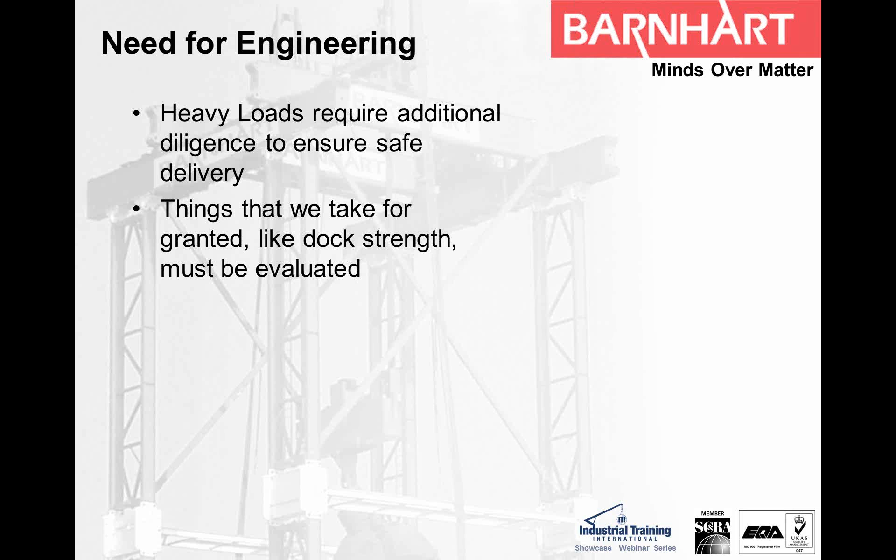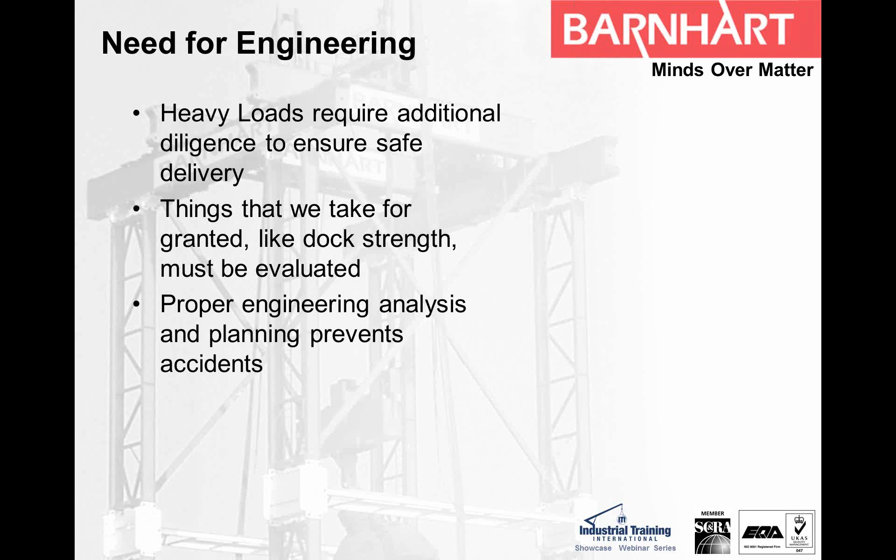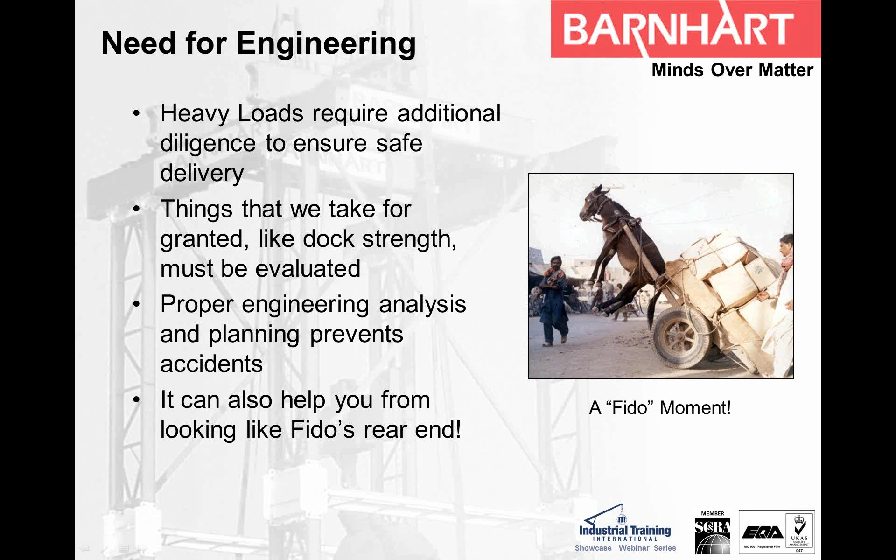Also, just as a little side note here, you see my friend being lifted up because they messed up the center of gravity. Here at our company, we have a saying that we don't want to look like Fido's rear end when we do our lifts. Obviously, we want to be safe, but we also don't want to look silly. And you can see here these guys having a Fido moment as they've loaded their cart too much and actually picked their prime mover off the ground.

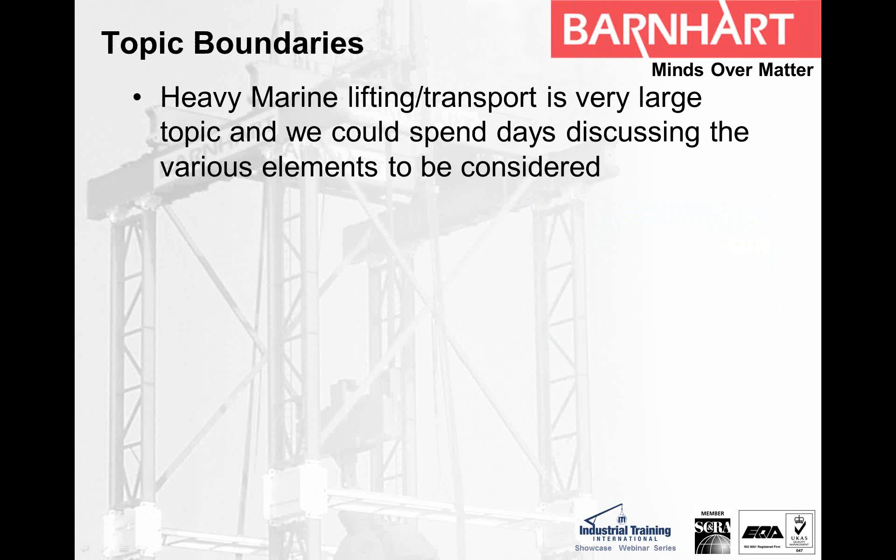So heavy marine and lifting transport is a very large topic, and I want to try to set a boundary for what we're going to talk about. We could literally spend days discussing all the elements that need to be considered. So what we're going to do today is limit our discussion to just the engineering associated with heavy cargo. Usually that's equipment like heavy wall vessels or generators, from offload from the ship to a transporter or rail.

We're not going to consider all the things associated with offshore maritime lifting or lifting in open ocean or even underwater lifting environments, even though those things may come into play sometimes when talking about maritime work. We're also not going to get into all the operational considerations either. You've got a lot of things other than engineering to consider when you develop these lift plans. We're not going to go into all those. I'll touch on some of them, but mainly I'm going to focus on the engineering associated with the work we're talking about.

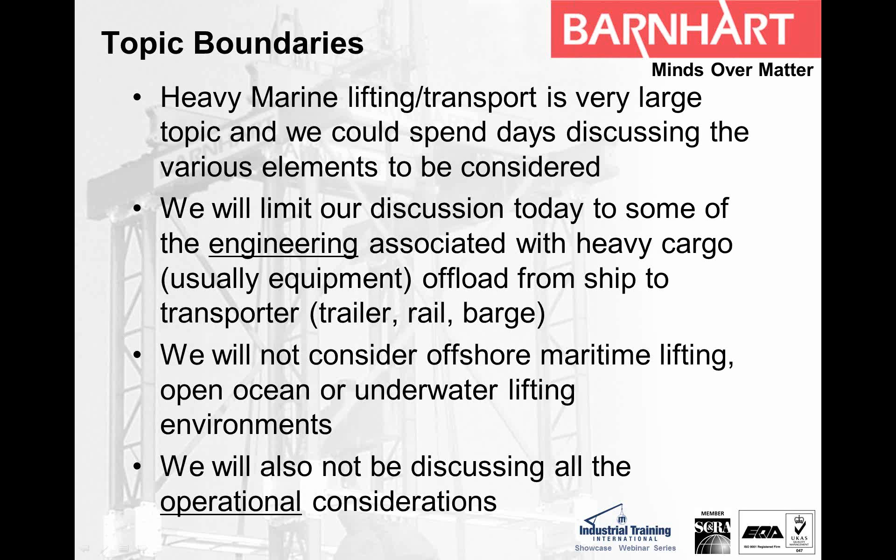All right, so the first engineering consideration really is the lift plan itself. And all heavy maritime lifting and transportation really does require that you have a lift plan.

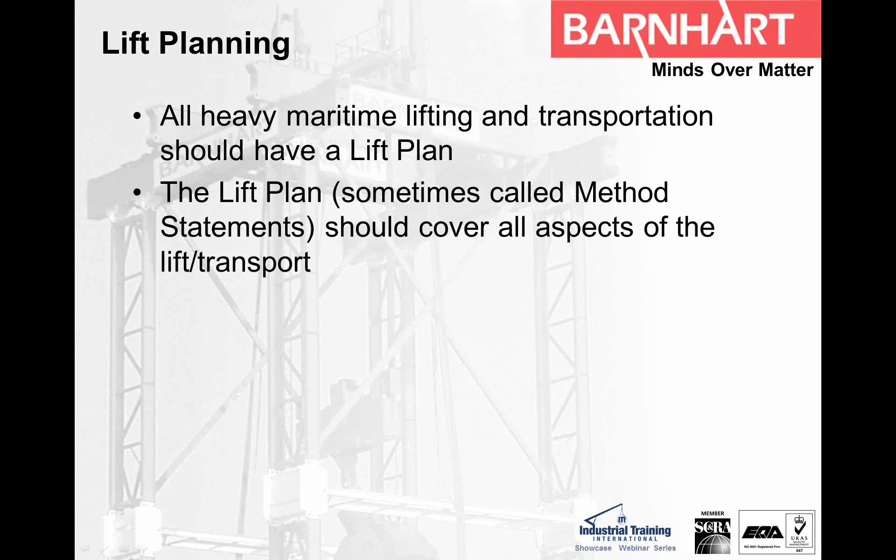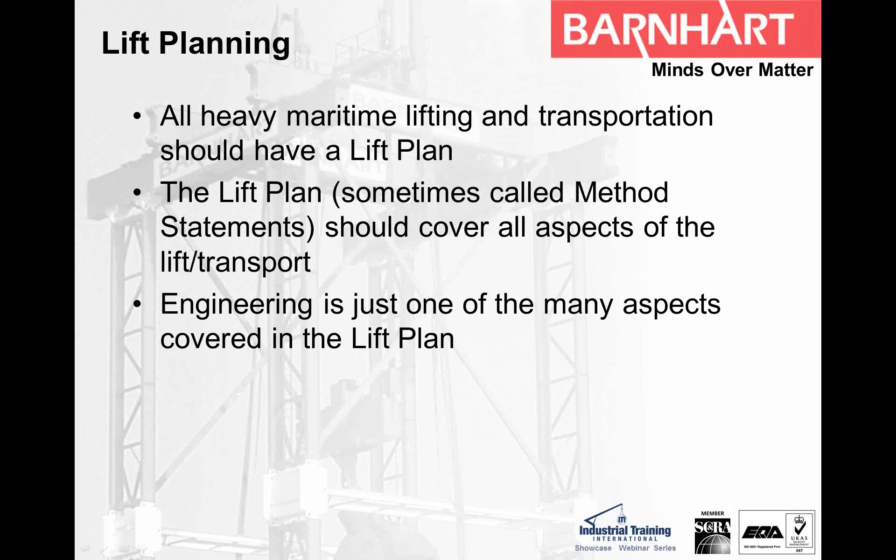The lift plan, which a lot of people now call method statements or project plans, should cover all aspects of the lifting and transport of this gear. In engineering, what we're talking about today is just one of the many aspects covered in a lift plan, so I'm not going to go into all the things in it. I'm just going to say there should be a complete, comprehensive lift plan associated with this type of heavy movement of equipment, and engineering is just one of the many pieces that fall into play.

There's a lot of good guidelines out there that talk about lift planning for maritime work and intermodal transport. Noble Denton, if you're not familiar with them, is like a tech service provider to the oil and gas industry, and they've written a lot of really good standards, from tie-down considerations on open ocean barges to what should be involved in a proper lift plan for heavy equipment. There are also two other organizations with similar guidelines: the International Maritime Organization and the International Marine Contractors Association. If you go online and Google them, they've got some really good guidelines for developing a lift plan.

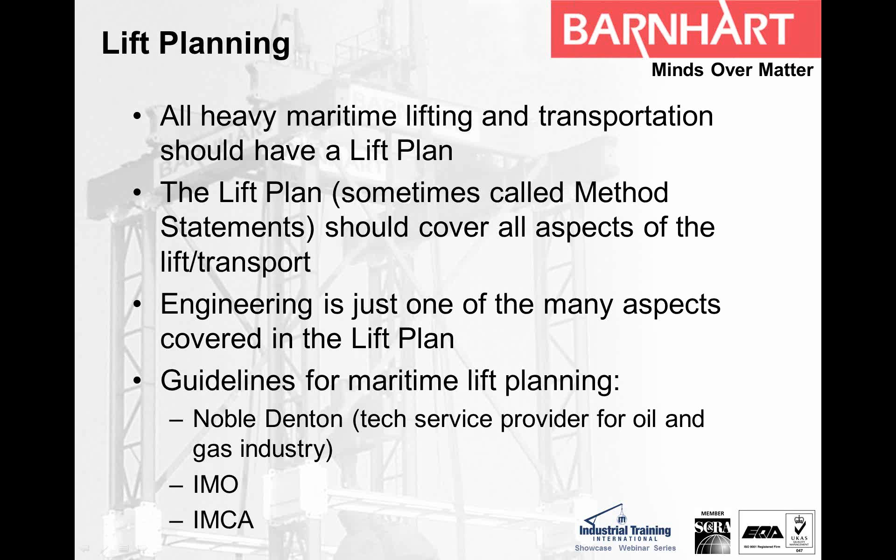So other than the lift plan, let's start talking about specifics. Let's look at what our ship considerations are going to be and the engineering associated with it. We're going to talk about four areas: the LHE associated with the ship, the position of the ship on the dock, ship stability, and some of the strength requirements associated with these big heavy transport ships, some of which are called ro-ro ships, where we're also going to look at the ramps.

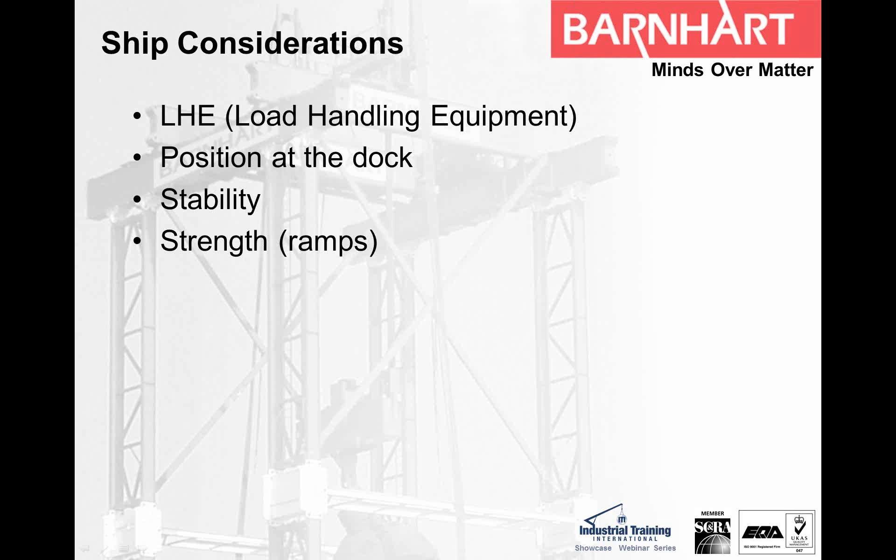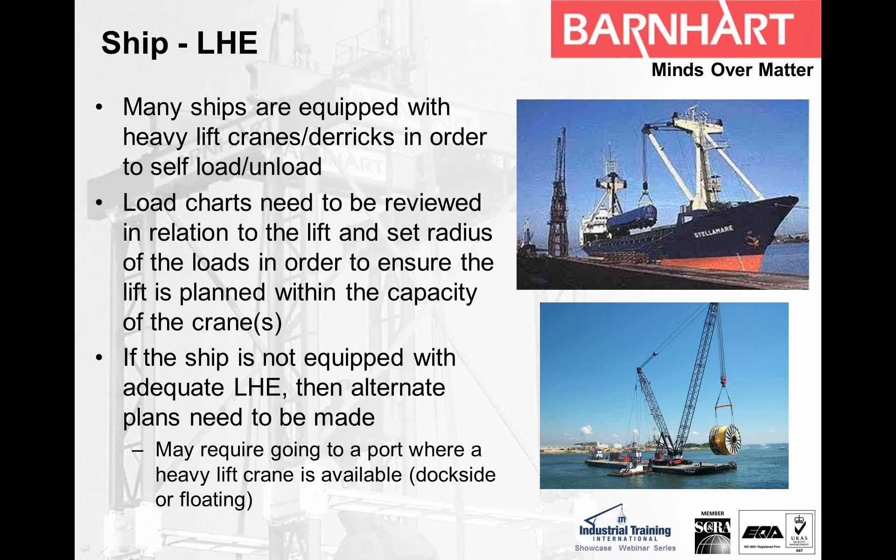If the ship's not equipped with adequate LHE, then a lot of times you've got to find alternate means to make the lift off the ship onto some other conveyance. That may require going to a port where there's already a heavy lift crane available, like this one here - this is in Port Mobile, this is our barge crane. Or you may find, like Houston's got one as well, there may be a big dockside or floating crane that's actually being used to service heavy lift ships that come into these ports.

What's really important on these LHEs on these ships is that you look at the inspection and maintenance records associated with the gear to make sure it's ready for service. A lot of these ships travel all over the world. They're subject to a lot of environmental degradation, and in order to be safe, you really want to make sure these ships are ready to make the lifts. So inspection records and maintenance records are good to look at.

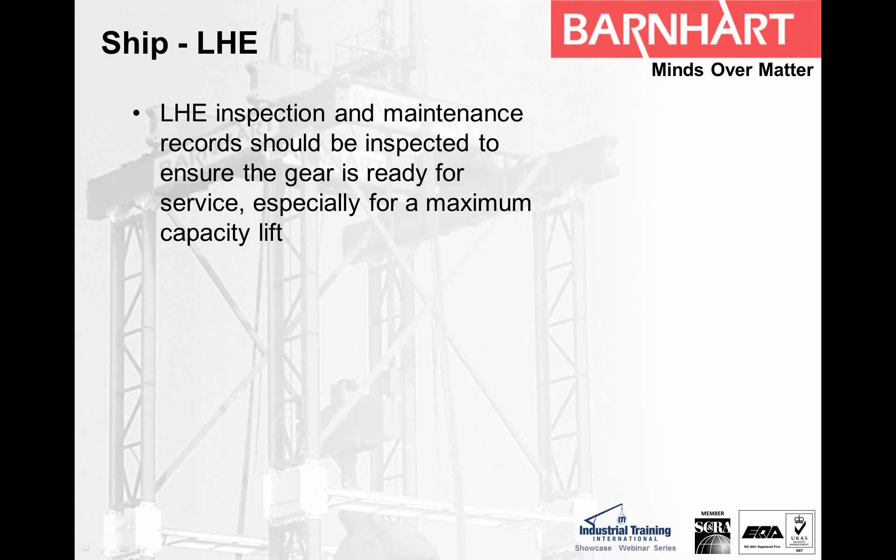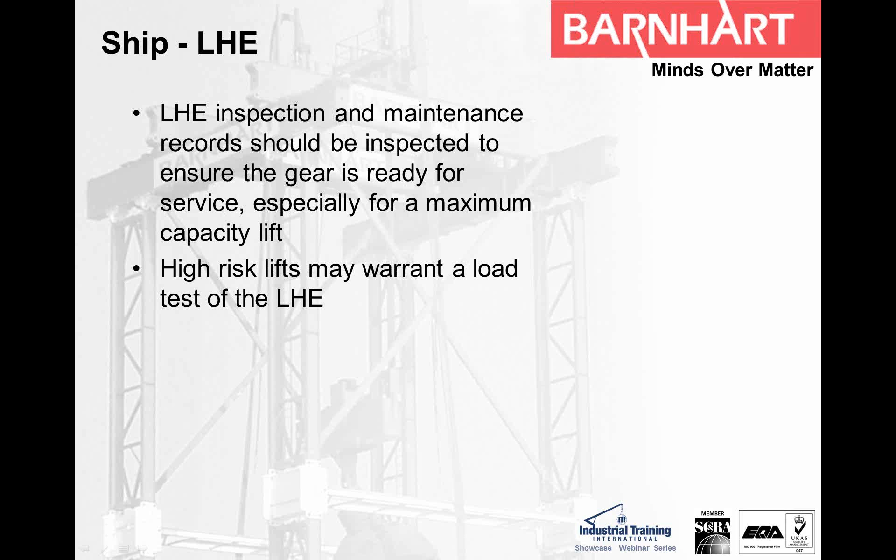And sometimes you may even want to do a load test. If you've got a high-risk lift, or something you're picking that's a one-of-a-kind or has a very long lead time to replace if something were to happen, we have seen where we've done actual test lifts with the ship's gear to make sure it's ready to go when you offload your prized possession onto that dock.

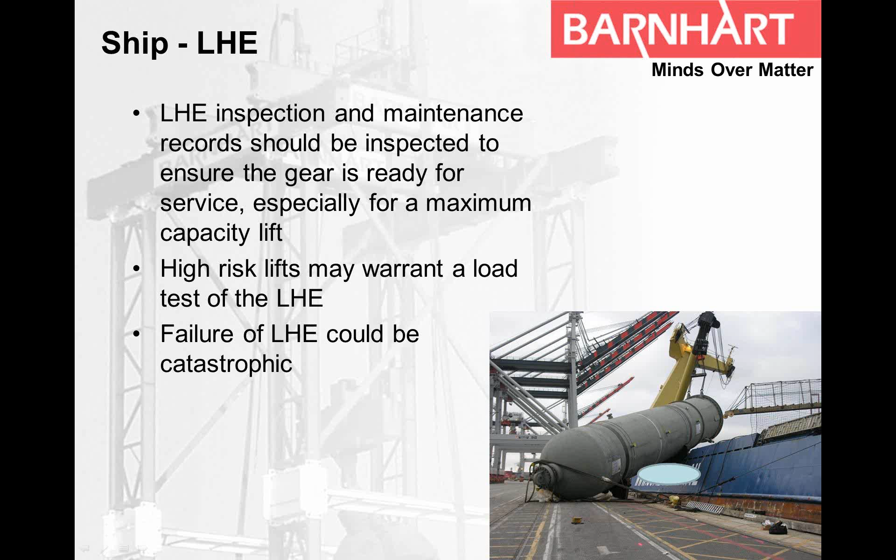You see here, here's an accident that happened a couple years ago. I believe this was in the port of Los Angeles, where the LHE load cable actually separated. It hadn't been properly cared for, and it parted the line, and one of the two cranes dropped its end of this big vessel. It was a heavy wall vessel that fell on the dock. So it's really important to make sure these inspection records, and maybe a load test, are done again to prevent this kind of accident from happening.

The dock position is another thing we want to look at besides the LHE on these ships. Ship position can be really critical in making sure you've got good lift efficiency. If you arrive there to make your lift onto your trailer or rail or whatever it is, and the ship's in the wrong position and they've got to reposition it, your lift may really have to be delayed. It costs money, and an improper lift position can also invalidate that whole lift plan you just put together.

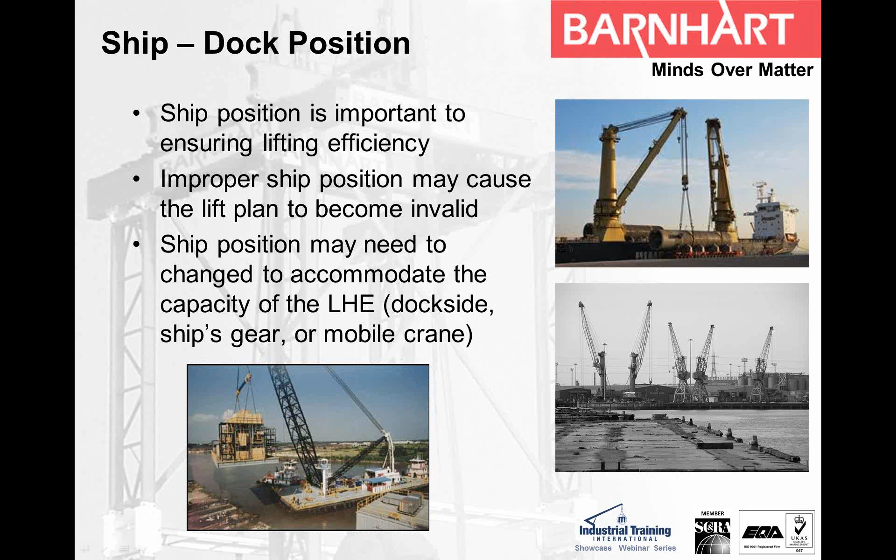So we want to make sure we communicate once we figure out the capacity of the LHE on the ship, to make sure we actually position the ship so you can use the LHE properly, whether it's a barge crane like Big John, something off the dock, or the ship itself.

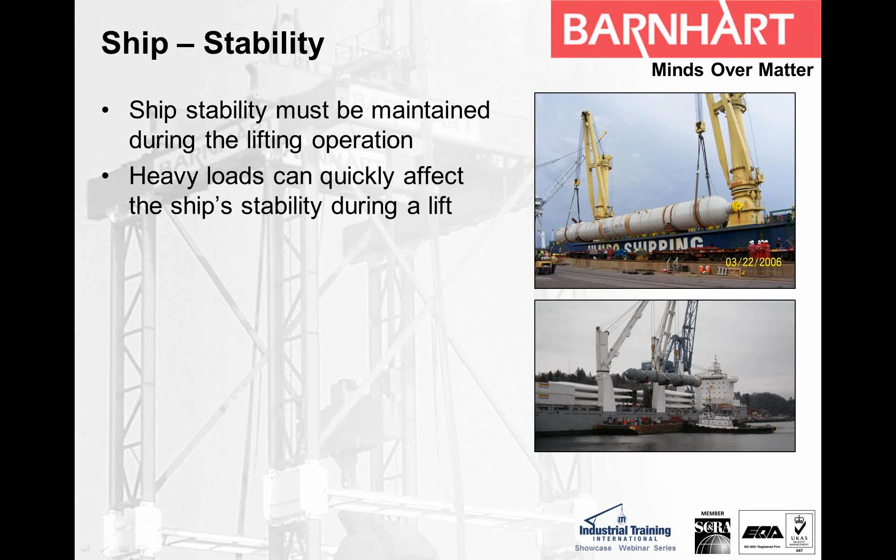Ship stability is another major consideration you've got to look at. These are very big vessels—you're talking about 1,000 tons moving off a ship like this. You can run into problems if you're not paying attention to stability during the lift. Those two pictures show vessels that weigh over a million pounds. As they take the load out of the hull and bring it to the dock, the ship has to spend a lot of time making sure the ballast is correct and all those things. Ship stability has to be maintained the whole time, because heavy loads can quickly affect the ship's stability to stay upright during the lift.

Usually the ship's crew will determine the ballasting plan to maintain stability, but this plan should be part of your lift plan and properly communicated to the lift team. Sometimes, if you've got a complicated or high-risk lift, it's a good idea to get a naval architect or marine engineer to validate those ballasting plans.

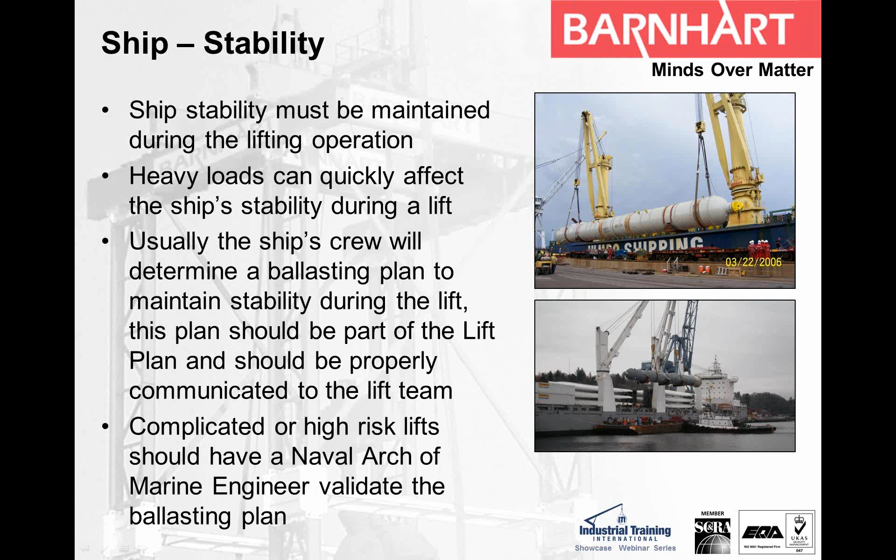Here's a couple of pictures showing where stability failures of the ship can be disastrous. This was an accident in Albany, New York, in December 2002. This ship was loading heavy power plant components headed out of our country, and they lost control of the ship's stability as the equipment was being loaded. The pieces in the hull appear to have shifted, causing the boat to become unstable, and she tipped over. The three men on board making these lifts were all killed. So ship stability is a very critical factor with these heavy loads we're talking about.

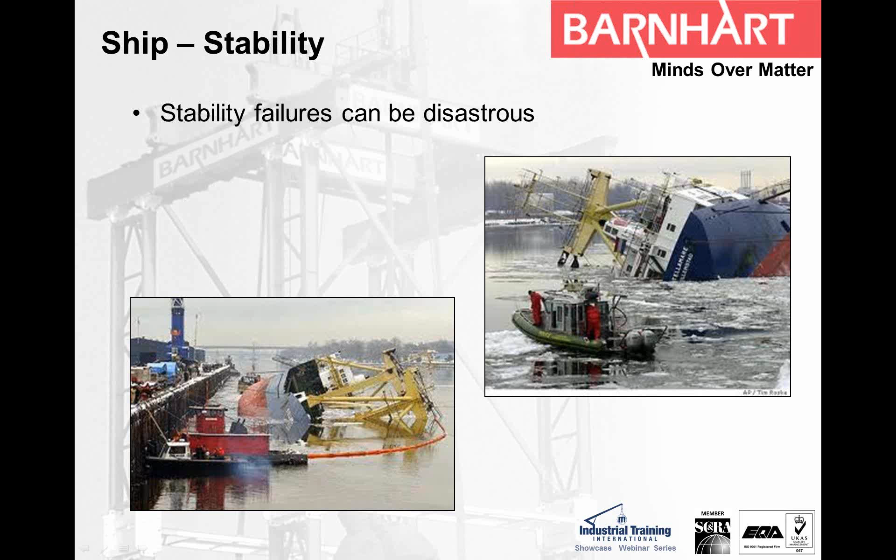All right, let's talk about ship strength. For our discussion, we're really just going to talk about the ramp strength. The ship in this picture is what they call a ro-ro ship, or roll-on, roll-off ship. It allows you to take heavy loads directly from the dock up onto the ship itself. A lot of times it's safe to assume the ship owners have already accounted for the structural strength to support the heavy load on the boat while it's transporting.

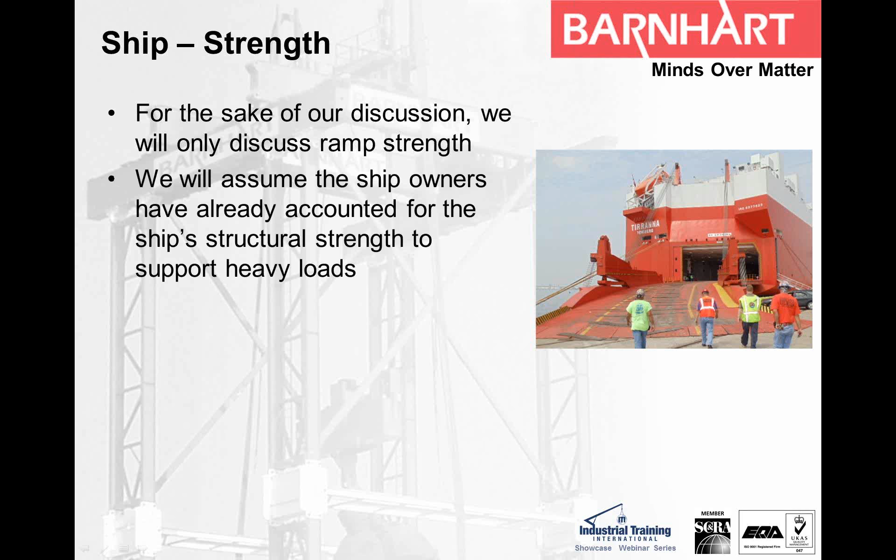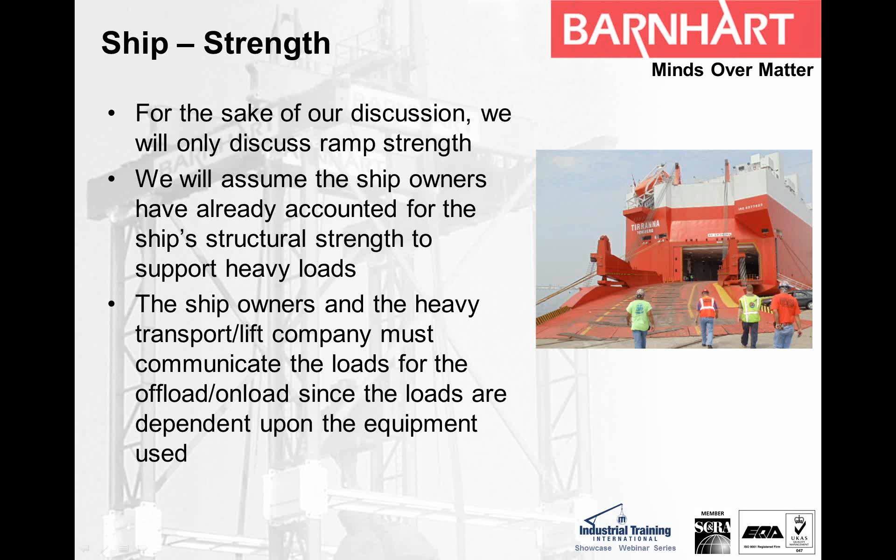So what the heavy transport company has to do when they take possession of the load is communicate the loads they're going to put on the ship's gear, and most of that depends on what gear they're going to use. In this picture, platform trailers are typically used for these heavy load transports off ro-ro ships. Depending on the number of lines on these platform trailers, the axle loads have to be taken into consideration to ensure the ramp design isn't invalidated.

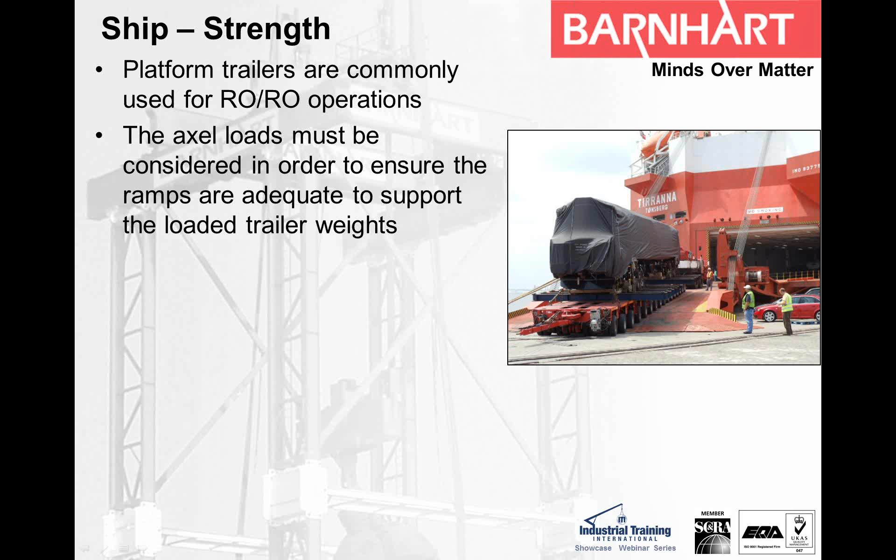There are lots of ways you can fix that. If you use too small a transporter, it might be good for the load but not good for the ramp, so you can maybe put more axle lines underneath it to spread the load out better. But again, it's got to be communicated very clearly with the ship and the dock, because there are reactions at the dock you have to consider—we'll talk about that in detail later. In this case, that ramp has a design limit, and we want to make sure we don't overload it. Another thing to note in this picture: you can see where I've circled those beams that this thing's sitting on. This is really not an engineering consideration so much as a coordination note.

A lot of times in order to save money, the shipper and the transport company can save our customers a considerable amount of cost by coordinating their efforts. In this case, what they did on that ship was they had it up on beams and stands, and that allows this transporter to drive directly underneath it and pick it up without having to jack the load up or spend a lot of time with alternate lifting gear. So this is a way to save and be efficient in our movement of these big loads.

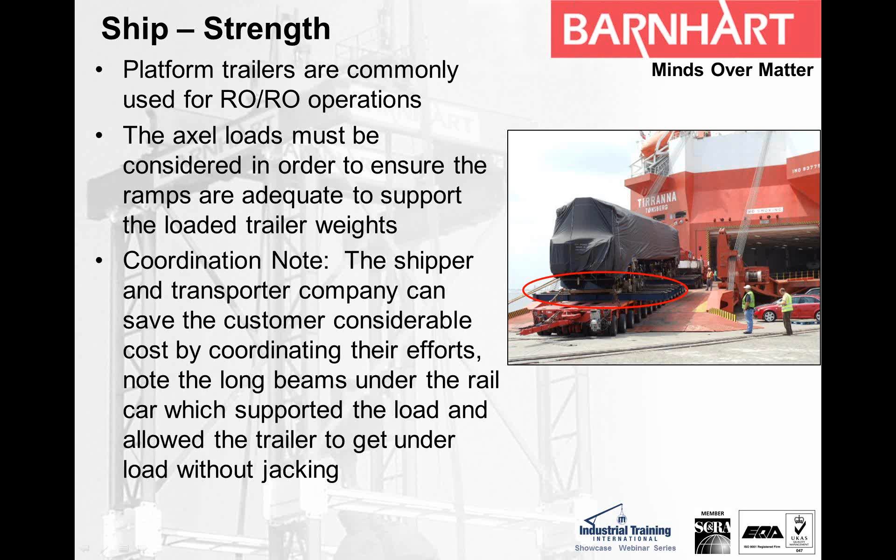All right, other than the ship, we got to consider a lot of environmental factors in our engineering considerations. The things we're going to be looking at are weather-related environmental considerations, tidal and current effects, and some environmental laws that are really impactful in our operations.

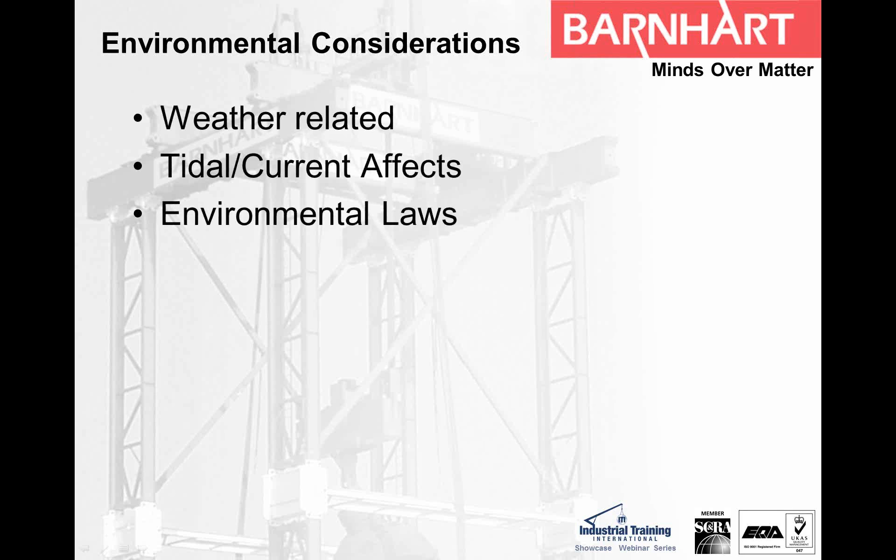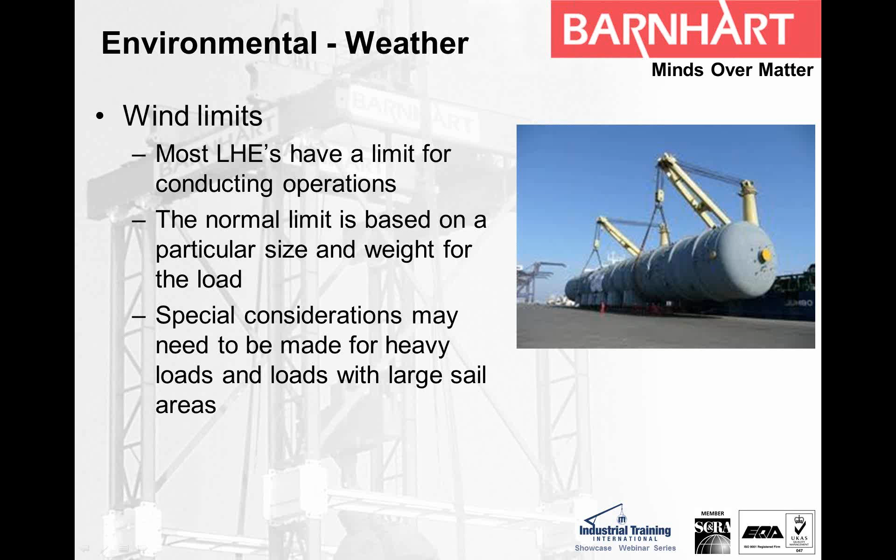So let's look at the first environmental thing, which is wind limits. Most LHEs have got limits associated with where they can do conducting operations, and that normal limit is based on a particular size and weight for a load. A lot of times it isn't anywhere near the size of like this vessel shown in this picture, where you're talking about a very big vessel with big sail areas. So in that case, you may have to take special considerations, and this is where an engineering team can come in and coordinate and look at the sail area and the requirements of the side loads that a big wind would impose on those LHEs, and make sure they've got a proper limit established for the lift to make sure we don't get into trouble with wind speeds.

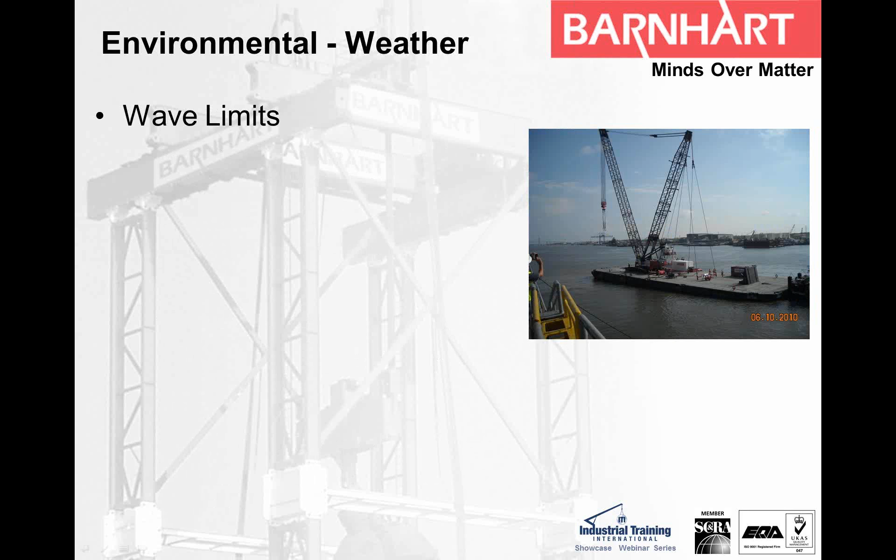You've also got wave limits you got to consider when you're doing environmental considerations for these heavy lifts. Wave height is definitely going to impact the ability of the LHE to make the lift. And if the boat's moving around, or in this case like this barge mounted crane here, there may be some very severe limits, even in the port, for how high the wave's going to get. So you've got to know those in advance. That's part of your lift plan - you want to be able to say, here's the limits of our wind, here's the limits associated with the wave action that's happening even inside a port for conducting operations.

Jim, if I can interrupt you just for a minute, this is Mike Parnell. We had a question from Jeff St. Amand with AEP on the experience that exists for roll-off barge unloading on Lake Michigan and other Great Lakes, and this seems to be about the location where he might have some concerns or considerations. You might comment on that question, please.

Yeah, that's a good point, Mike. If I understand right, some of the considerations on the Great Lakes are for maybe a roll-off or for unloading the ships. In the Great Lakes, there's lots of things you have to consider, because even though it says lake behind it, it's anything but a lake. If you guys have been up in that area and been on the Great Lakes, they're considered open ocean. So everything from the tie-down restrictions, which I'm going to talk about a little later, to the transport engineering associated with deck strengths and things, all has to be open ocean. So that's one consideration you've got to have.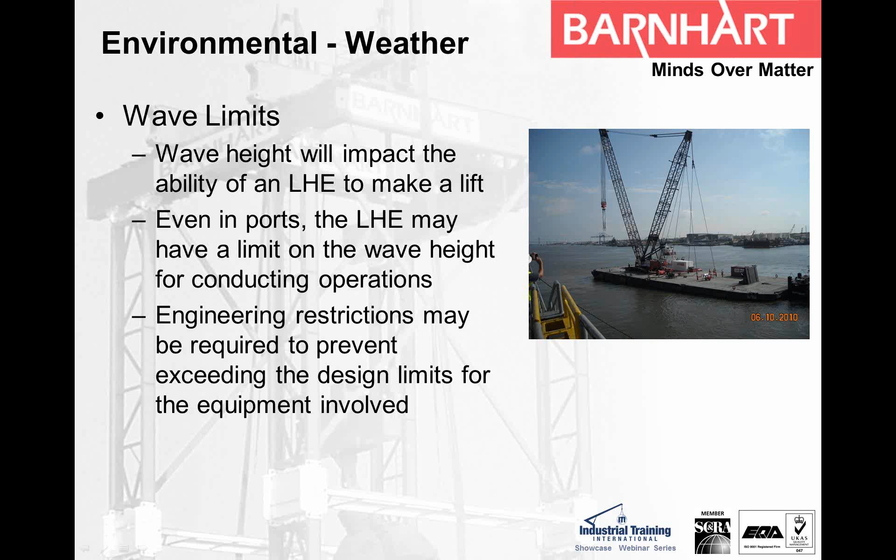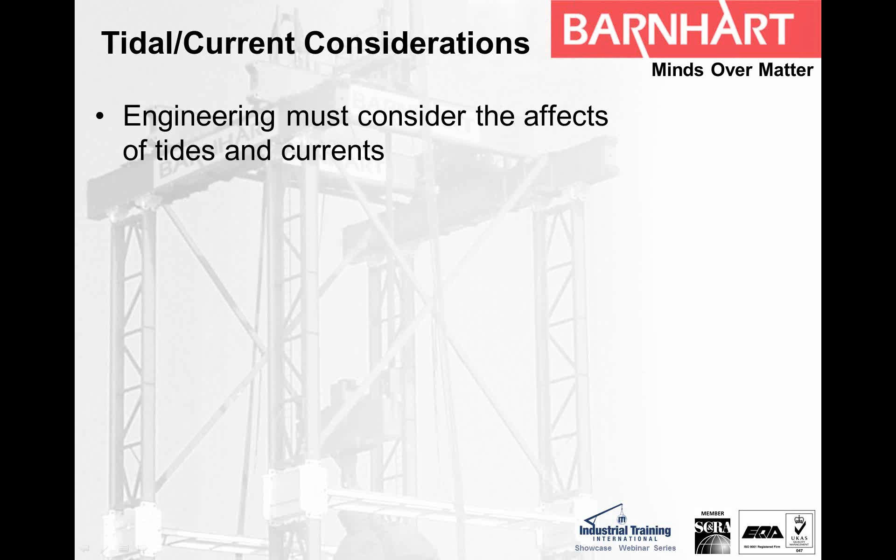All right, other than wave restrictions, the other thing we've got to look at is tidal and current conditions when coming into ports or moving things up rivers to offload. The timing of lifting and transport operations can be critical. Up in Maine, we had a lift where the tide swung 8 to 10 feet in a day. With that kind of tidal movement, you really have to consider your mooring, and water depth becomes critical, as well as station keeping, because with that tidal swing you also get very strong currents. So as you're rolling off, the last thing you want is the back end of the barge moving around, creating a disaster where you could actually drop the load. All these things have to be heavily considered in your engineering.

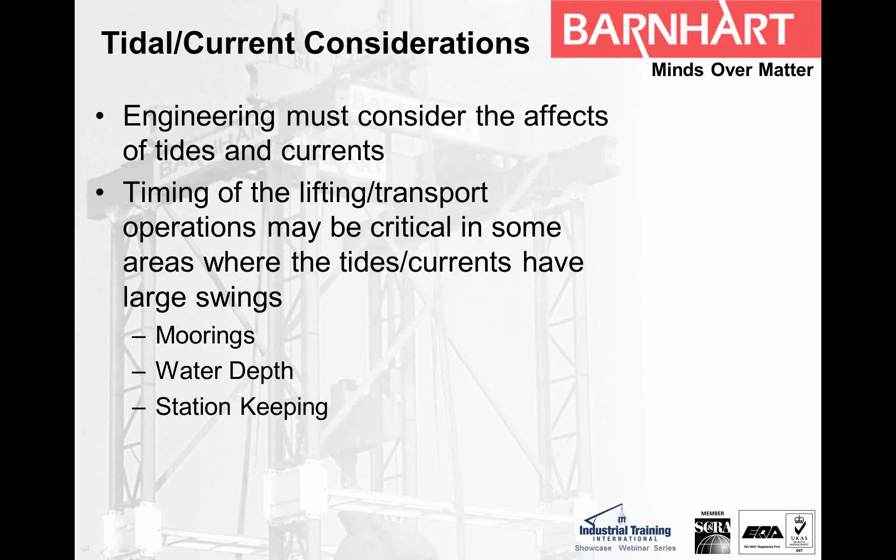Hey Mike, you may want to mute yourself there, buddy. Somebody's got pretty high mic load coming in. Okay, we'll check it on our end.

Go ahead, Jim. Okay, environmental restrictions with local environmental laws is a big deal to look at. A lot of ports in the U.S. now have rules associated with ballast discharge. Even though this may not be engineering, it's still got to be part of your planning.

All right, sorry about that. Looks like I got muted accidentally. Okay, let's get back to it.

So we're talking about ports in the U.S. that have rules associated with ballast discharge. Engineers have got to know these rules because a lot of times you've got to consider the ballast position for these barges. You're going to be adding water during the roll-off and roll-on, which is part of the barge considerations we'll talk about later. So knowing what the rules are in these local areas is important. I think it's well organized for you.

The important thing about these rules is sometimes you can take on water in one port and you can't discharge it at another port, which is a big deal. So make sure you know those rules. If you were coming into the Port of Mobile and going to offload up in the Great Lakes, there are restrictions on water transport discharge from one body of water to another. So you may have to do all your ballasting in Mobile and leave the water in it, making sure you're ballasted for your roll-off even before you get there.

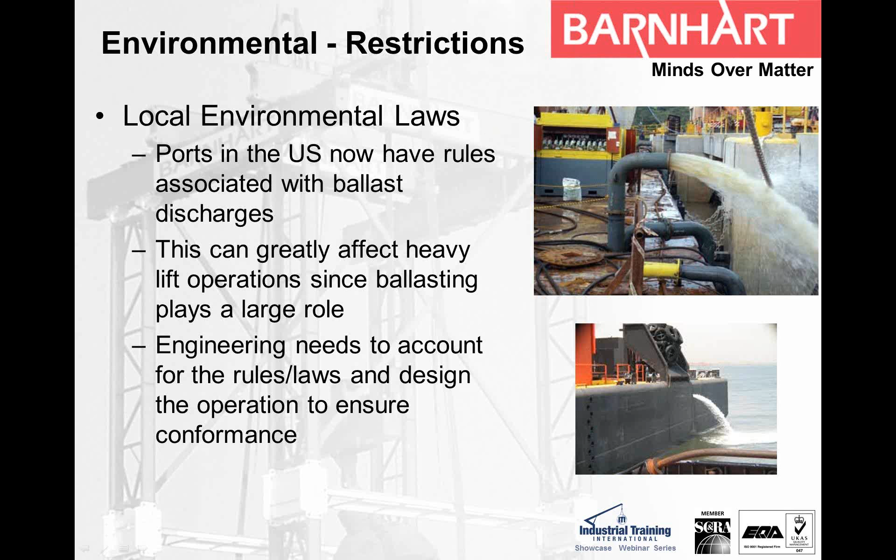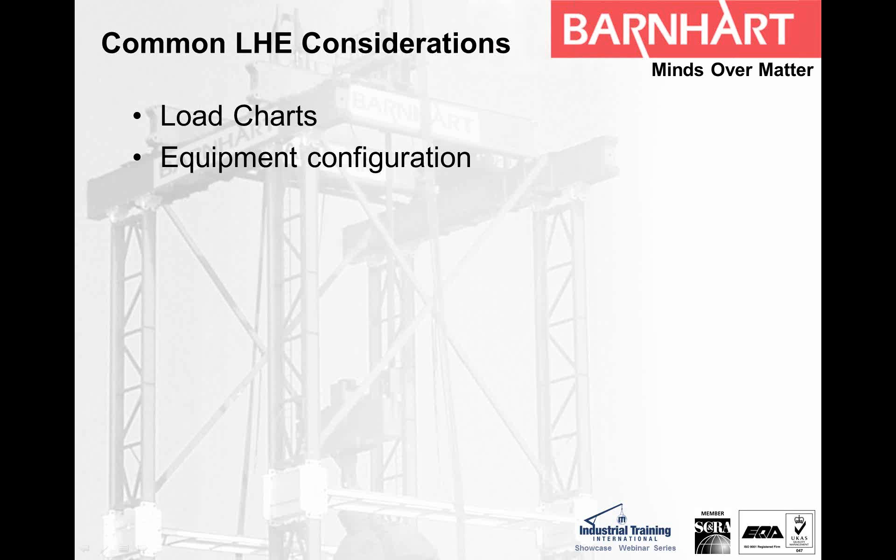All right, let's talk about common LHE considerations. Now that we're done with environmental, let's go into the LHE itself. These would be things on, like, our barge-mounted cranes, not the ship's LHE. So let's talk about load charts and equipment configurations, pretty common to all LHEs regardless of what you're using.

The load charts, like static and dynamic effects, have to be considered. A lot of times when lifting on water, you may have a local requirement, or for conservatism want to consider dynamic effects in your lift plan, and some of those can be pretty considerable. If you start looking at a 10% dynamic impact factor on a really big load, you can push yourself into a whole other crane category, which might mean considerable cost to the end user paying for the services. There may also be local restrictions - a lot of refineries now will limit how much of the chart they'll allow you to use, so you need to know these things before you do your engineering plan, and then your engineering plan's got to consider it.

Mike, we're still getting a lot of feedback, brother. I don't know if anybody else can hear it, but we'll carry on - if you guys can wipe it out, that would be great. It's pretty good.

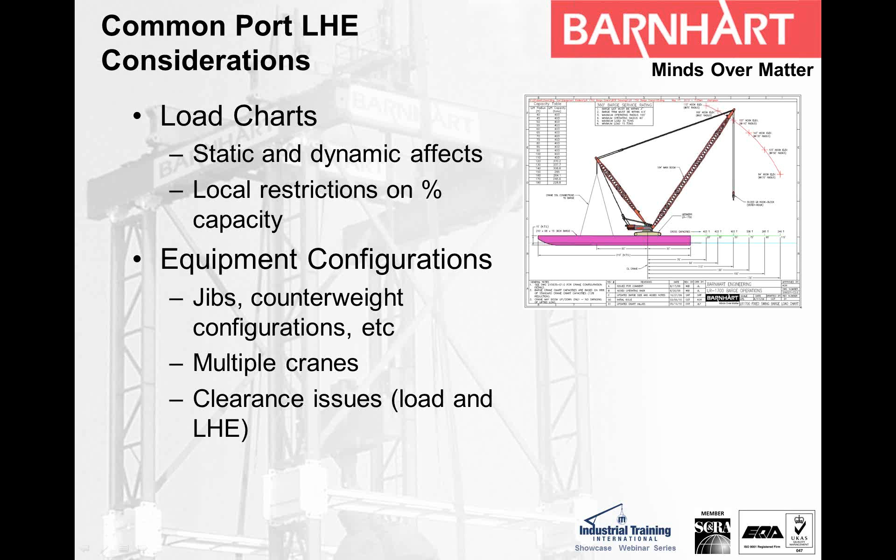All right, let's keep going. The equipment configuration is another thing to consider here. The jibs and counterweight on the cranes are different - you may have a mobile crane up against your ship that you're using off, and you've got to consider that. You've also got multiple cranes that might be involved, so the configuration of those cranes is important. And then your clearance issues, like the load and the LHE itself, making sure you've got adequate clearance as you pick the load and move it around.